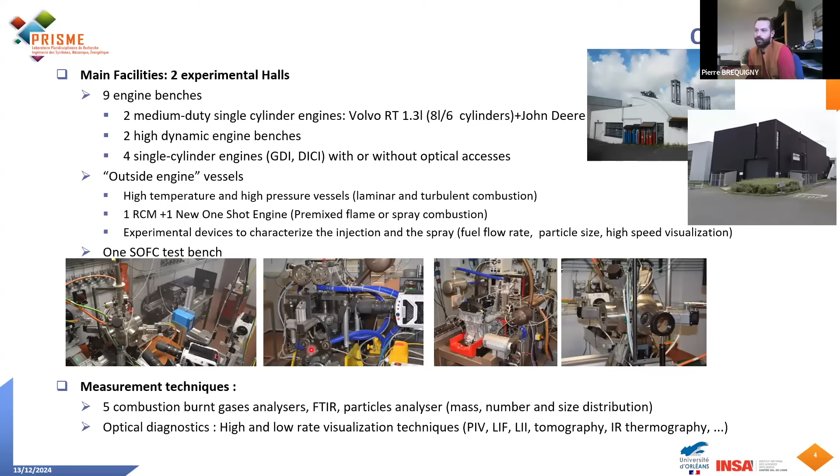We also have vessels to characterize injection and spray development for liquid and gaseous jets. We use a lot of optical diagnostics, techniques such as PIV, fluorescence, tomography, Schlieren, and so on. And on the engine test bench, we are also interested in exhaust gas analysis, using different kinds of analyzers.

So where do we place our activities? Basically, we are really between the chemistry fundamentals data, where we can find burner, JSR, or kinetic mechanism development, and the multi-cylinder engine standard engine activity, where we are developing powertrain, testing the fueling system, the lubricant as well, or different combustion modes.

Between that, we are covering from fundamental data like laminar burning velocity, ignition delay time measurement, the interaction between the flame and turbulence, the effect of the aerodynamics of the engine on the spray mixing formation in the chamber or the ignition itself, and then try to characterize a bit the energy output of the engine using in-cylinder pressure measurement, heat release rate, and how this can affect pollutant emissions.

You can see some of our partners for collaboration below, both academic and industrial. You can recognize one, Belgium, here.

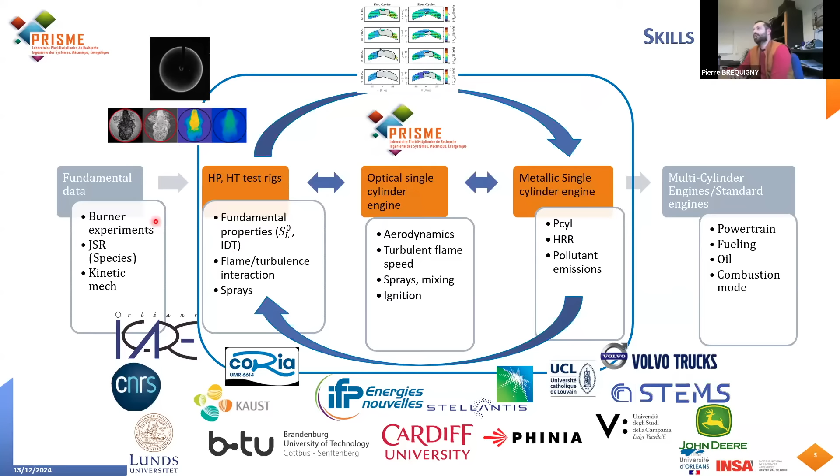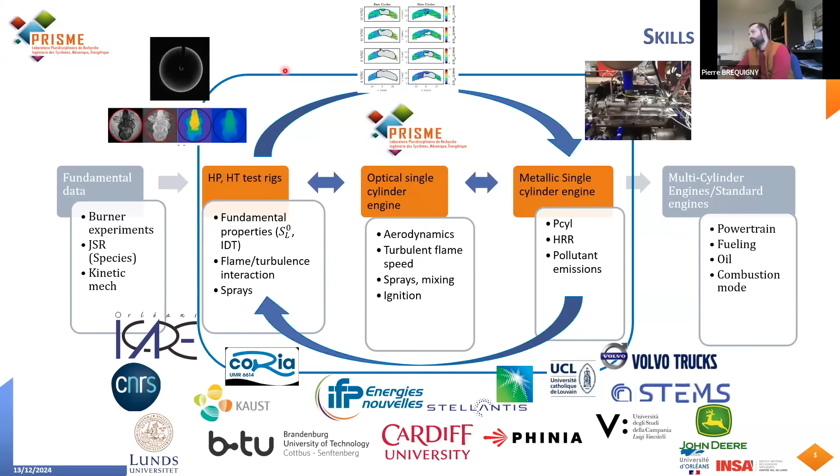This is a bit the type of data we can produce. Here you have first a laminar flame propagating. Here you have hydrogen jets. Here you can see some flame propagating inside an engine together with the velocity field acquired using the PIV technique. And this is a photo of a single cylinder all-metal engine where we can get the heat release rate and the pollutant emissions.

So basically, my research is using all of those experimental setups. It is more focused on premix turbulent combustion, starting from the laminar burning velocity measurement using a combustion vessel, then how this laminar flame can interact with turbulence during its propagation and how it is accelerated by the turbulence or not.

Then, how it works in an engine. Because the flow field is much different than in our vessel here, we also have very different conditions in terms of pressure and temperature. And finally, how that affects the performance of the engine, both in terms of power output, efficiency, or emissions.

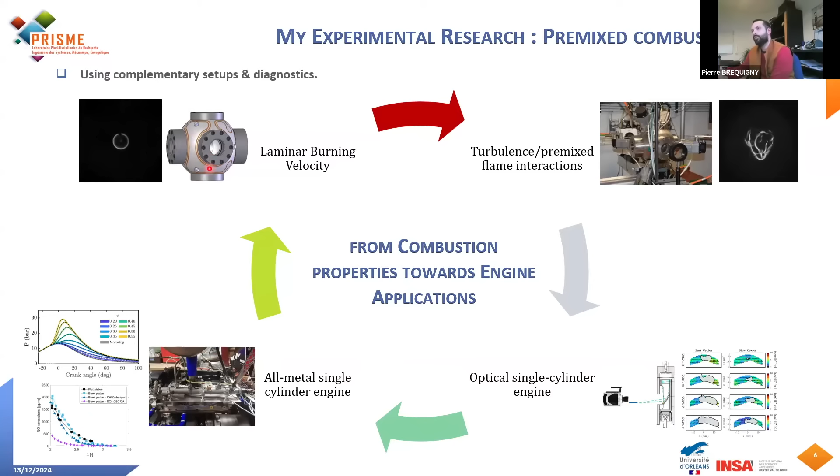And we can have a look, because some of this result can at some point be explained by the fundamental data, or try to be correlated with the fundamental data, as I will show later on in my presentation.

So how did I get my inspiration for this presentation? I will start with two things that I liked. The first one is history. I'm really passionate about history, reading books, watching documentaries, and actually as a kid I wanted to be a history teacher. So I'm a teacher, but not in history, it's not bad.

And the second thing that I like, which was the point of this presentation, is Belgium. Not only to make those people happy, because I used to work with them, collaborate, discuss, and it's always a great pleasure, because also, as Alessandro said, I spent some time there in Belgium and I have the best memories there.

So combining those two things that I liked, this is what we can find in the books. I don't know if you are aware of this, but this is a coal gas ammonia fuel bus. During the Second World War, due to diesel and gasoline shortage, the Belgian people had to convert their bus fleet to ammonia. And this worked quite well.

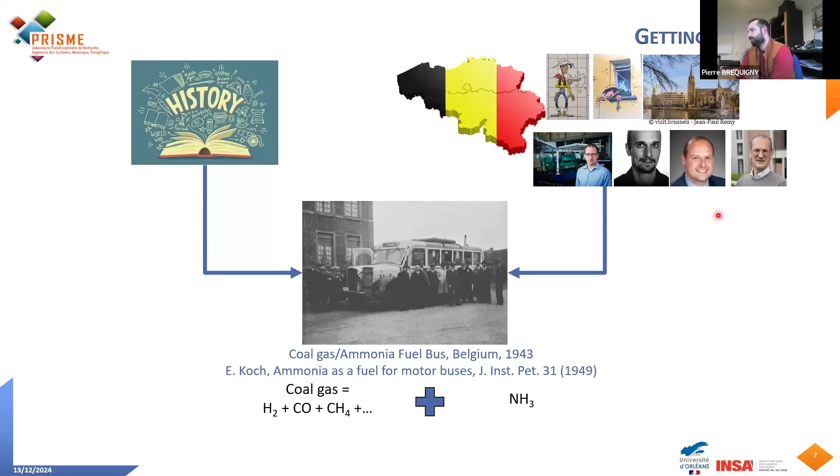And if we look a bit closer at what we have in that engine, actually coal gas and ammonia. So basically, these buses use all the fuels I'm currently working with. It has hydrogen, it has ammonia, but it also has a mixture of hydrogen, CO, methane, which can be called syngas in our case.

So this is basically the outline of my presentation. I will start with hydrogen, fundamental engine work, then ammonia, and then biogas and syngas with, for sure, a bit of ammonia because we are kind of ammonia lovers in the lab.

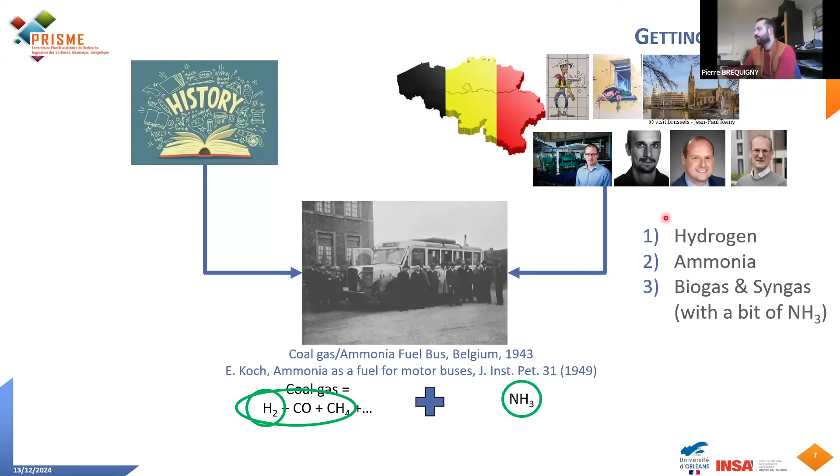So let's go back to the future then. As said, I will start with the hydrogen activity. The PI of those activities is Fabrice Foucher. You can see different collaborators that worked on this in recent years. It is based on several industrial collaborations, but also national research projects.

Regarding the hydrogen engine, it has several challenges. First thing we can say is it kind of competes with fuel cells. And to compete with fuel cells, the hydrogen engine has to be zero emission, which is quite challenging. But using lean to ultra-lean mixtures, so very high lambda, you can reach almost zero NOx emission, as you can see from that figure here.

Other challenges using that include reaching high load. At some point, you always need to increase a bit the equivalence ratio. You can also have knock or super-knock occurrence, even with those lean mixtures. As you can see on this graph of in-cylinder pressure acquired in an engine, as a function of crank angle degree, this blue curve shows kind of super-knock, even with very lean mixture, and this was done in our lab.

And also another challenge is backfire, especially in the case of port fuel injection, when at some point the flame goes back into the intake, which is critical in terms of safety. So this is how we worked a bit with hydrogen here in the lab.

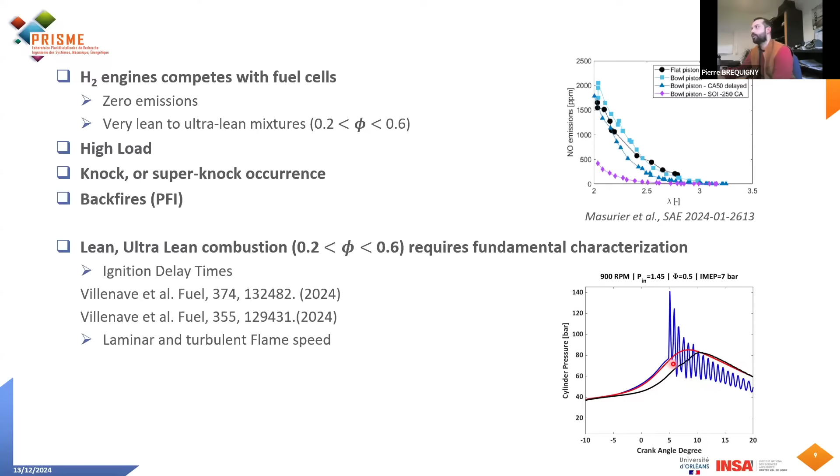So to investigate those laminar and turbulent flame speeds, we have a combustion vessel in the lab, which is here. It has 4.2 liters of internal volume. In terms of initial conditions, the maximum are 10 bar and 200 degrees.

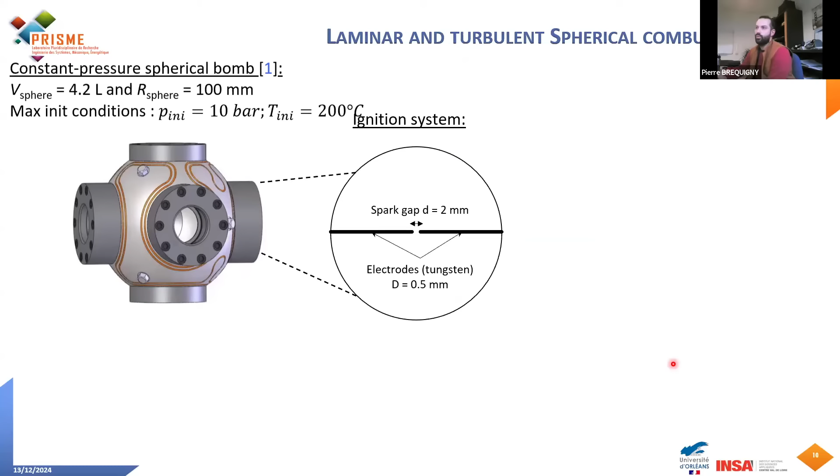Inside, we can find two tungsten electrodes that enable us to ignite the gaseous mixture inside. We can implement fans or not to generate a homogeneous isotropic turbulence zone inside the vessel, to study flame-turbulence interaction. In the case of laminar combustion, we only use one fan, basically to mix the air with the fuel and to have something really premixed before igniting the mixture.

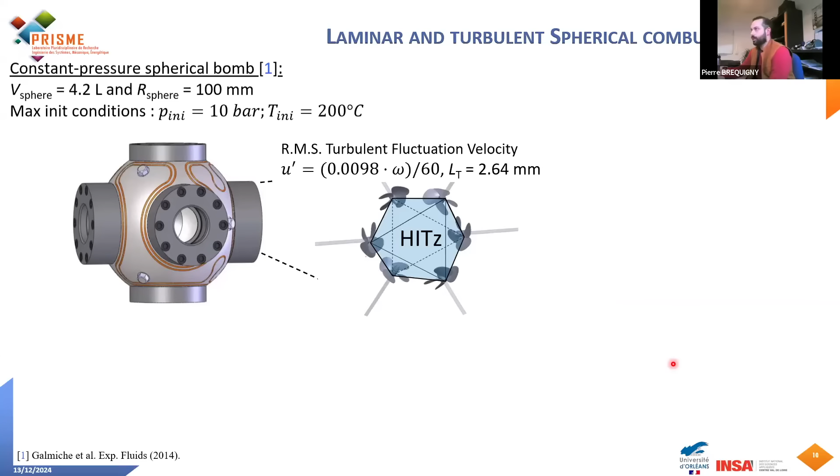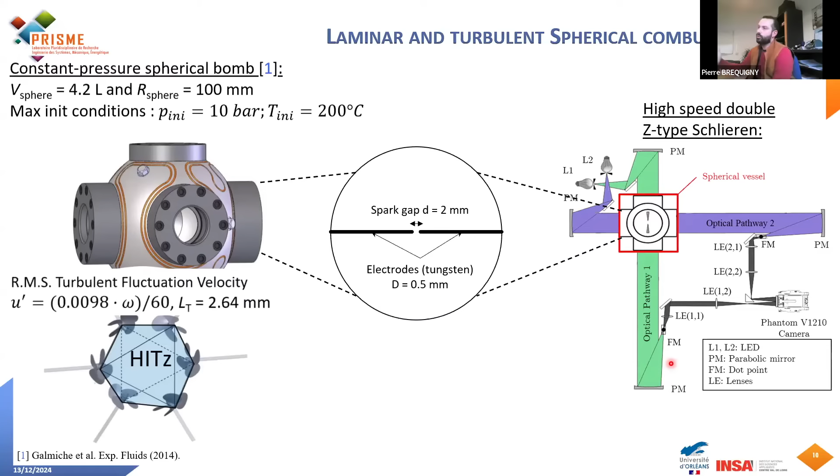And then we use optical diagnostics. Here an example is a double Z-type Schlieren viewing that gives us two planes of visualization of the flame, and allows us to follow the flame propagation and then measure the speed.

So how do we measure the speed? From the radius evolution, we can compute the propagation speed. And since the flame is spherical and expanding, it is affected by stretch, so it is something we have to compute as well. It is defined as follows, and it basically depends on the flame speed and on the curvature.

So when we want to measure the laminar flame speed, we have to be at zero stretch. It is not possible to reach that condition in our vessel, so we have to extrapolate the data at zero stretch. Here you have an example of the flame speed, the propagation flame speed, as a function of the stretch.

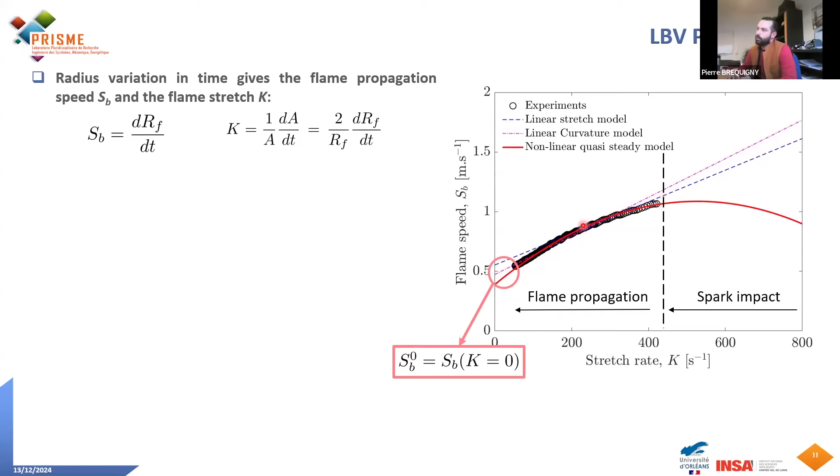Here you have the beginning of the propagation, which is impacted by the ignition, by the spark, so we have to remove that part. And then we have our experimental data. As you can see, it does not reach the zero stretch, so we can use several extrapolations to go to this zero stretch point.

The first one is called the linear stretch model, defined as here, where you can see the propagation speed at zero stretch, the stretch, and the LB parameter, which is very important here, which represents the stretch sensitivity of the flame. Basically, it is called the Markstein length.

This one is well appropriate for mixtures that have equidiffusivity, so a Lewis number equal to 1. But in some cases we cannot use it, because some mixtures deviate from Lewis number equal to 1, especially hydrogen. So we can use a second extrapolation model, which is only based here on the curvature, as you can see on this term.

And the last one is the nonlinear one, which is a bit more complex in terms of extrapolation, and is well adapted for mixtures that strongly deviate from Lewis equal to 1, and highly stretched flames.

So you can see here the results of those three computations, and it gives very different results depending on the fuel and its properties.

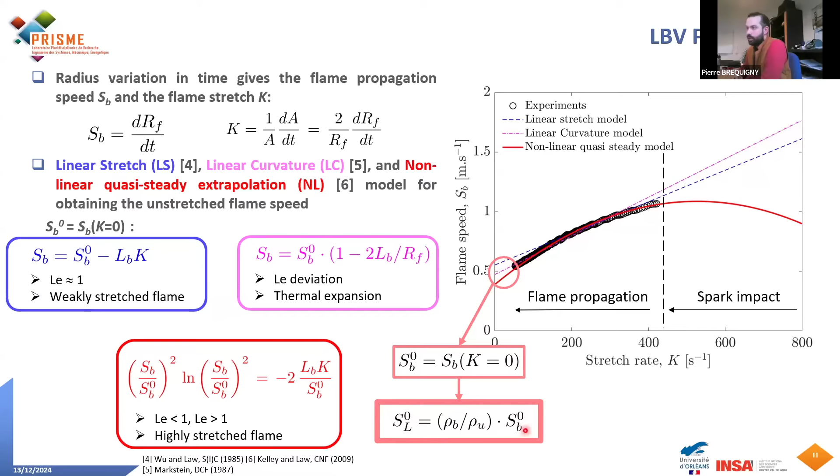At the end, basically, we need to recover the laminar burning velocity, and we only need the expansion ratio, that is usually computed with an equilibrium computation.

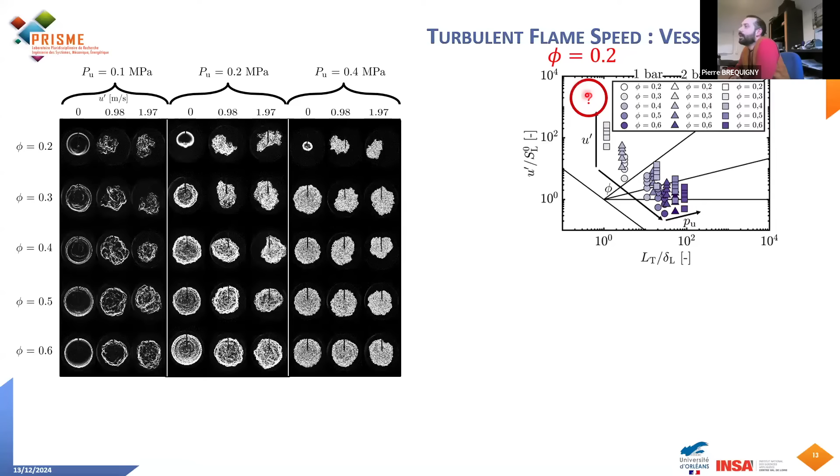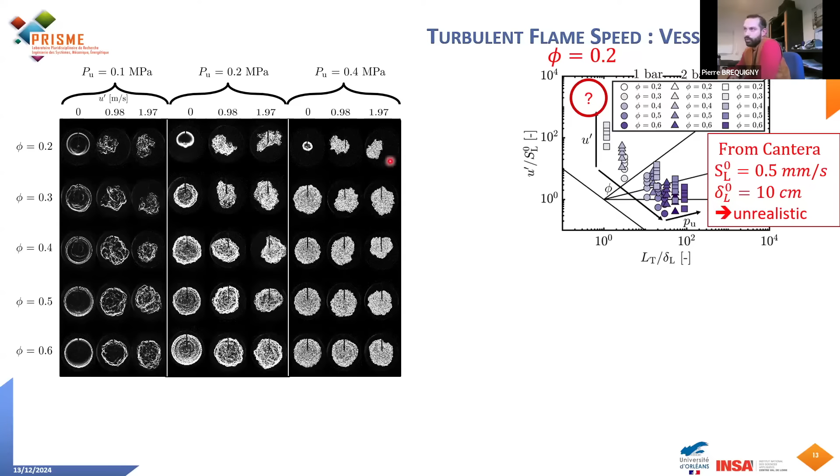But at some point we have a problem, because as you can see, there is no white data, because we are not able to properly estimate the laminar properties of the flame in those conditions. If you do a simple Cantera simulation, you will get that order of magnitude for the laminar flame speed values, and especially the flame thickness, which seems a bit unrealistic if you compare to the flame you are looking at in the vessel. So we don't really know how to place those flames in the Peters-Borghi diagram.

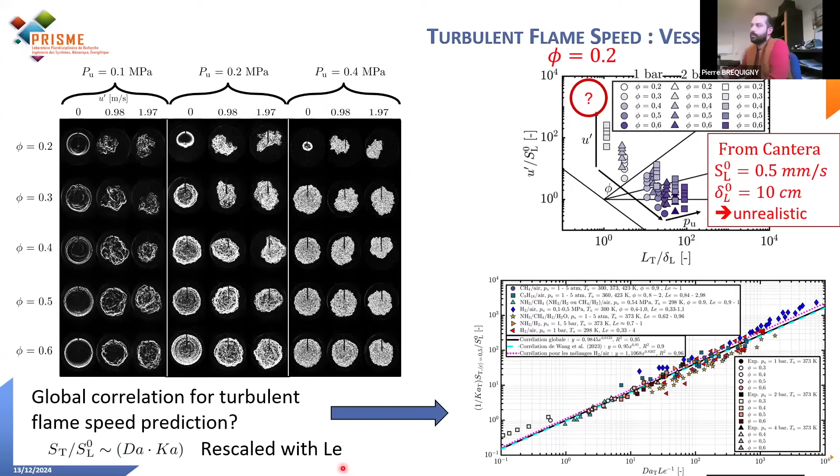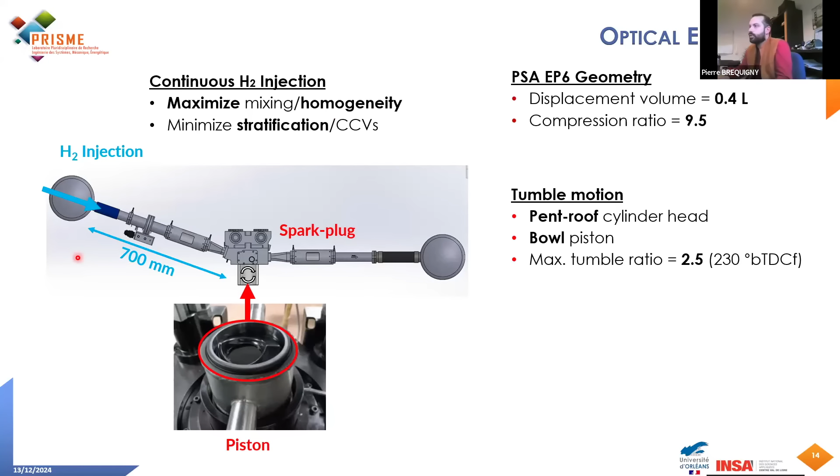The motion is a typical spark ignition engine motion, because it has a pent-roof cylinder head. So you will have a tumble motion that will break as the piston moves up and will generate the turbulence afterwards. We have a continuous hydrogen injection placed here in order to have as much as possible a homogeneous mixture, in order to avoid any stratification and different equivalence ratios inside the chamber. And then we can follow the flame chemiluminescence using a filter, an intensifier, and a high-speed camera.

We covered very different operating conditions. So it's quite low engine speed for a spark ignition engine, but due to the optical access, you cannot increase the engine speed that much, otherwise you break it.

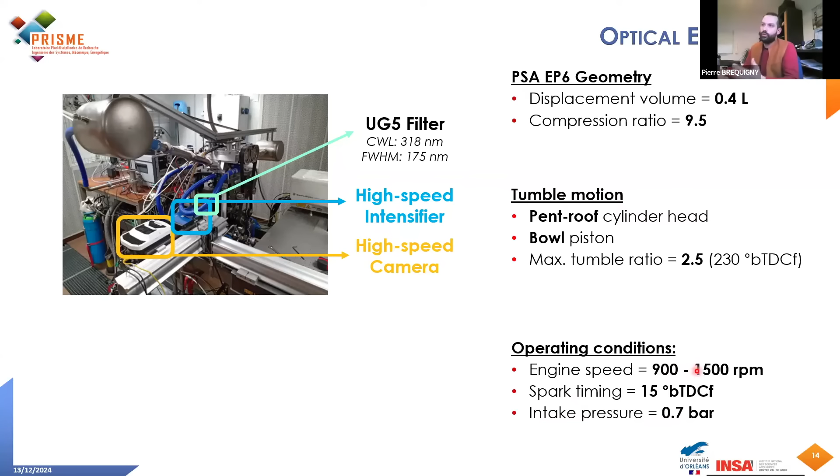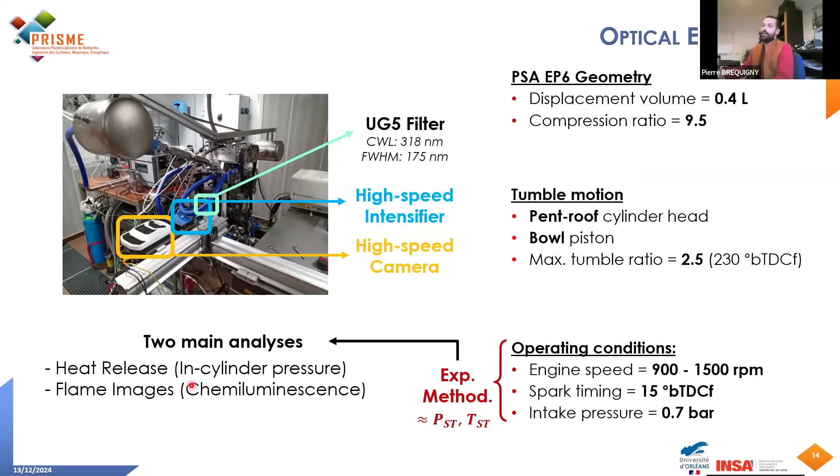The spark timing is quite standard, and it is also low intake pressure, a bit for the same reason as the engine speed, in order to not break and to not have too high a load inside the engine. We can then do a coupled analysis between what we can see from the camera and what we can get from the in-cylinder pressure sensor, which will also give us the heat release rate and, let's say, the combustion phasing inside the engine cycle.

So basically, from the images, this is the typical type of flame image you can get from hydrogen combustion. And again, here you have the Peters-Borghi diagram with all those different combustion regimes. So here we varied the equivalence ratio from 0.55 down to 0.2. And as you decrease the equivalence ratio, same as before, you are moving up in the Peters-Borghi diagram, into the region called the broken reaction zone, where basically you have a Karlovitz number that is very high, and normally there is no CFD model that is really able to handle that.

But looking at the flame, it just looked like a very wrinkled flame, very distorted. So perhaps it is still a flame that is propagating, perhaps with sometimes local extinction. We don't know because it's difficult with that diagnostic. And if you increase the equivalence ratio, you can see that the flame gets more and more spherical, which makes things easier in terms of diagnostics.

And then we can go back to the turbulent velocity measurement, but this time in the engine with engine conditions, both in terms of pressure, temperature, but also turbulence. And you can see that we are able to fit a simple Zimont model, which is regularly used in CFD computation to compute the turbulent burning velocity.

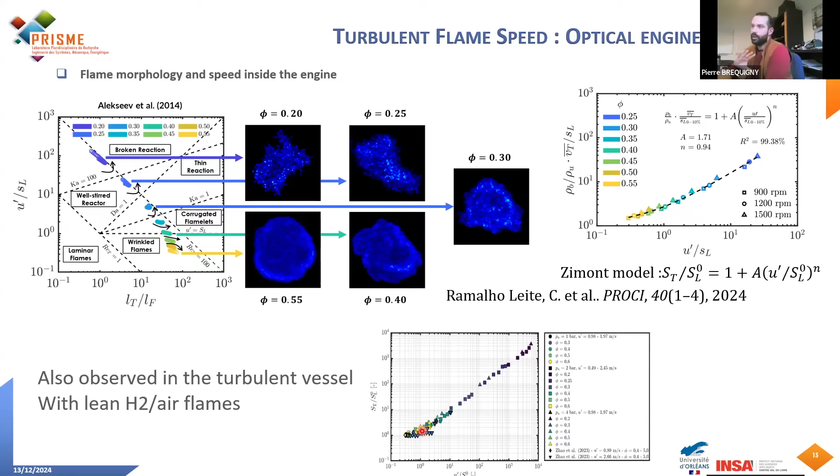And one interesting thing is that we also observe a similar correlation, at least for lean mixtures, here for example from 0.2 to 0.6, in the vessels, which gives us a bit of confidence in that relation. It is interesting to see that we can find it both in the vessel and inside the engine. So this is most of the work done with hydrogen.

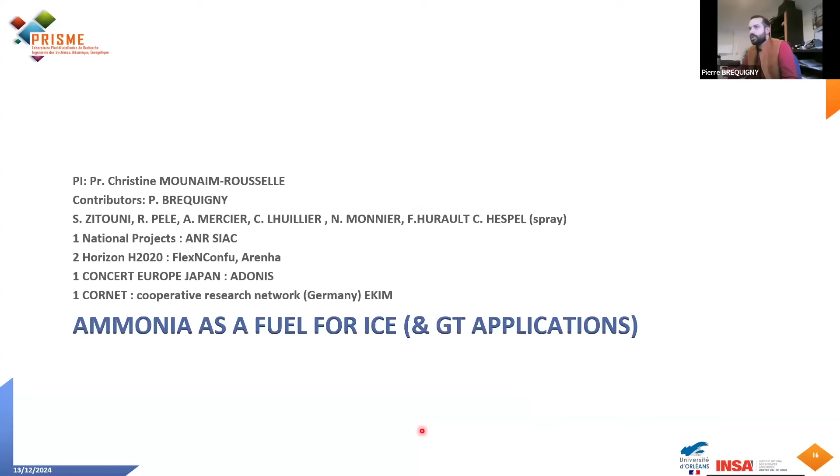I will now move to another fuel, which is also a hydrogen carrier, ammonia. This is the main part of my presentation because we have been working on ammonia for 7 years together with Christine, with a lot of national, European, and collaborative projects. And I have to acknowledge here a Belgian colleague, Francesco Contino, because the momentum came from him. So, just a bit of a word on ammonia.

There are more and more projects announced to produce renewable ammonia all over the world, either in South America, in Australia, but also in Europe and Africa, and with very different scales. But for the moment, there are very few pilot facilities.

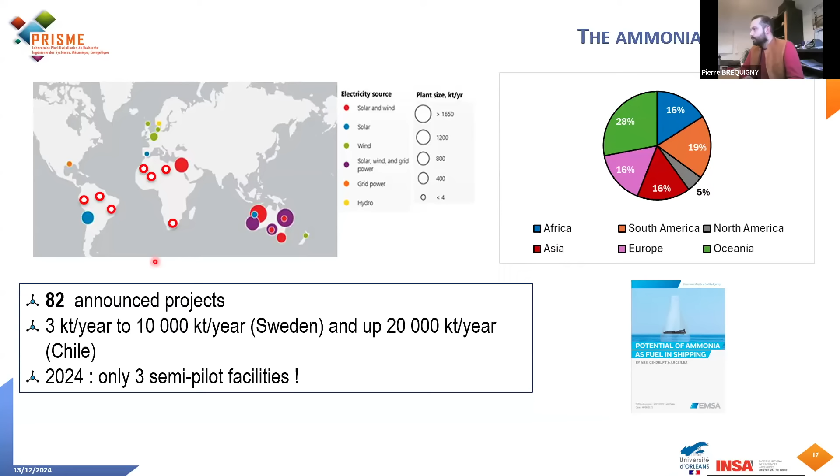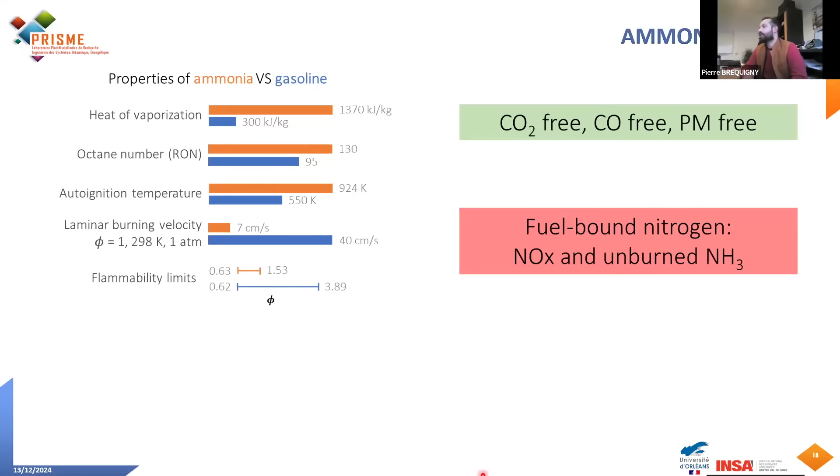So how do we do it with engines? When we started the work, we thought that due to the high octane number and the auto-ignition temperature, the spark ignition engine was an easier solution to use ammonia as a fuel. The idea is that either you can use it pure, neat ammonia, is it possible? We don't know. Or due to those slow burning combustion properties, perhaps we can blend it with another combustion promoter. You have here a list of what we tested in the laboratory: methane, hydrogen, and alcohol.

Another idea, still with the spark, is to go with a compression ignition engine due to its higher compression ratio that leads to higher efficiency, but use it with a spark, and then favor the use of neat ammonia to avoid any other tank on a vehicle, which makes things easier.

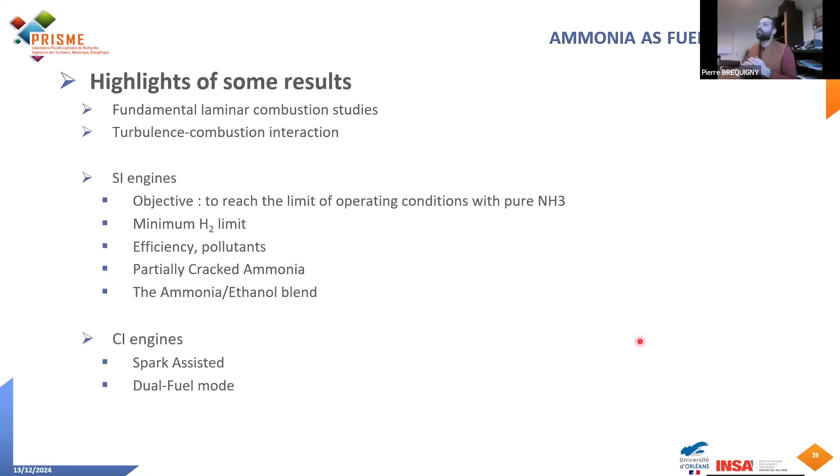So presenting all those possibilities with ammonia engines, I will present some highlights of our results. First, starting with the fundamental properties, a bit of turbulence and combustion interaction. Then our results obtained with spark ignition engine, where our objective was, let's say, to reach the limit of operating condition with pure ammonia and see how we can extend those limits. And last, see how ammonia can be used in compression ignition engine.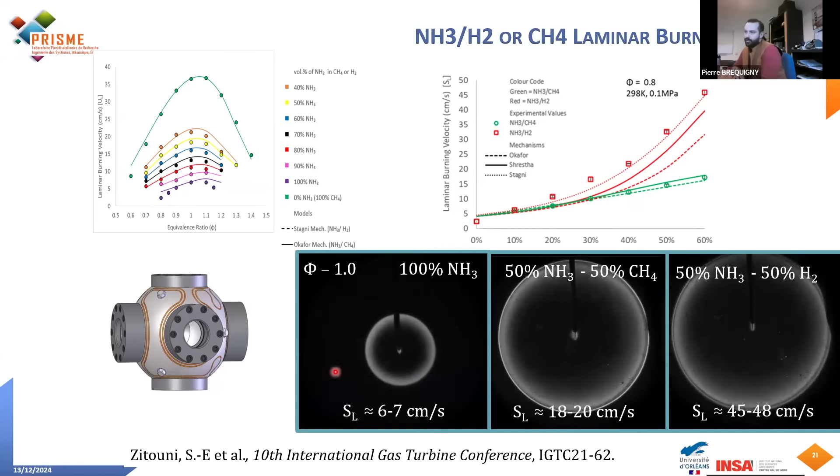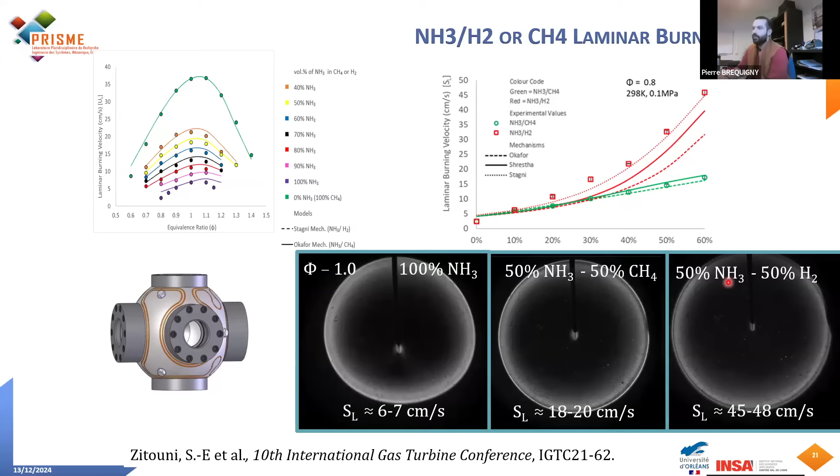How those flames look like. So here you have stoichiometric 100% ammonia flame. You can see how slow it is, compared with 50% ammonia, 50% methane, and a 50-50 ammonia hydrogen flame. So that is the first thing we noticed about the ammonia flame and how we can, let's say, improve it easily. But also adding those fuels will really impact the other properties.

And again, we are here interested in the Markstein length, especially because it gives an idea of how the flame will respond to the turbulence inside an engine. So basically, when you add methane here, you decrease the Markstein length. So you are less sensitive to the stretch. And since you are getting closer to zero, you may favor a bit the propagation with the turbulence. But here with hydrogen, you even tend towards negative values of the Markstein length. And this means with turbulence, you will strongly enhance your flame acceleration. And this is a typical behavior of hydrogen addition that was also found putting some hydrogen into methane, for example.

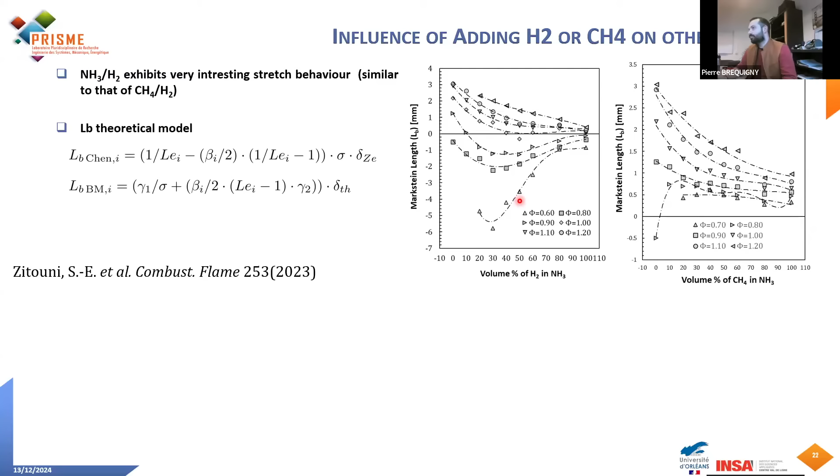So again, we tried our theoretical model here to see if this behavior is correctly predicted, let's say. And we found some agreements. So you have here lean, stoichiometric, and rich mixture. And we find some agreement between our experimental Markstein length measurement and those theoretical models, with the exception of this point. So pure ammonia, 0.8 of equivalence ratio, which is a bit out of the trend, but we are currently investigating it again. And so here you can see basically that for lean and stoichiometric mixture, you can really get a negative value of the Markstein length due to the hydrogen addition.

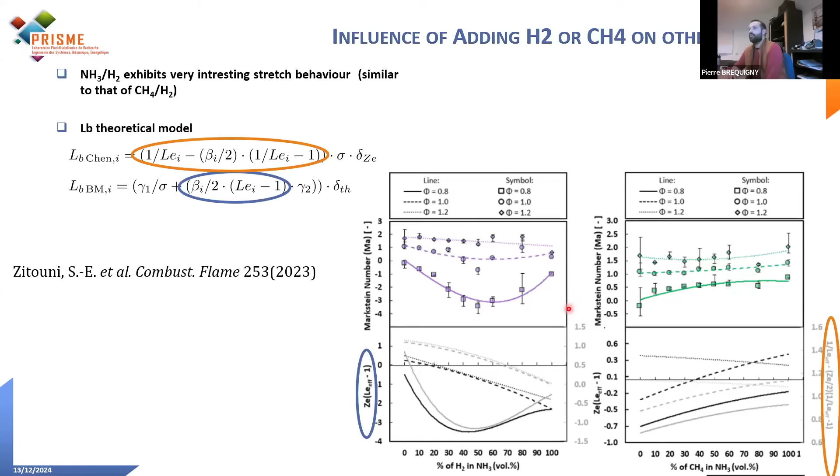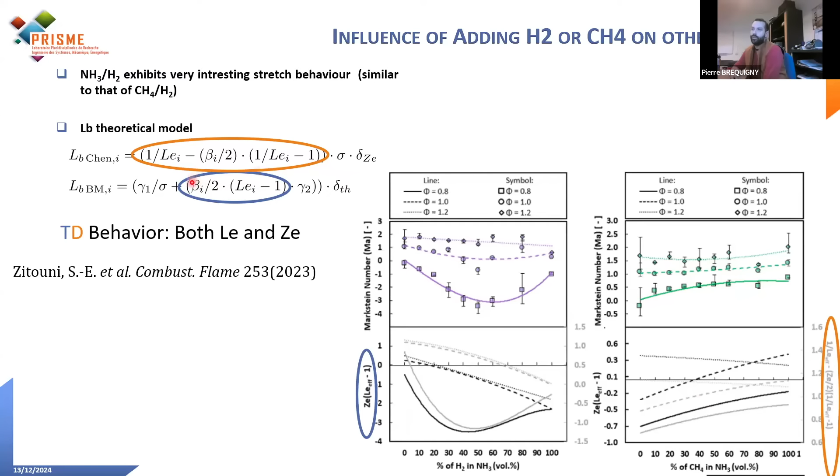And why you get that? Because basically of the thermodiffusive behavior of the mixture. So in those two theoretical models, we can isolate two terms, this one for the Chen model and this one for the Bechtold and Matalon model, that are represented here and here for both hydrogen addition on the left and methane addition on the right, and compare with the Markstein number, which is basically the Markstein length divided by the laminar flame thickness. And we can see that this Markstein number follows the same trend as those terms, which represent the thermodiffusive behavior of the mixtures, since it has both the Lewis number and the Zeldovich number, which is related to the activation energy.

And this helped us also to understand how it works inside an engine. So since ammonia has a very slow flame, the idea is to boost it with either hydrogen or methane. And the question is how this impacts the engine propagation. So here you have a graph of the CA50, so it's the timing where you have 50% of mass burned inside the engine, minus the spark timing. So it is a duration in crank angle degrees.

And basically you can see that when you add hydrogen in your ammonia, you strongly shorten the combustion duration. Whereas with methane, you basically have something constant. Question is why? Because in both cases, you improve the laminar burning velocity, so you should be, let's say, faster with both promoters, but it is not the case.

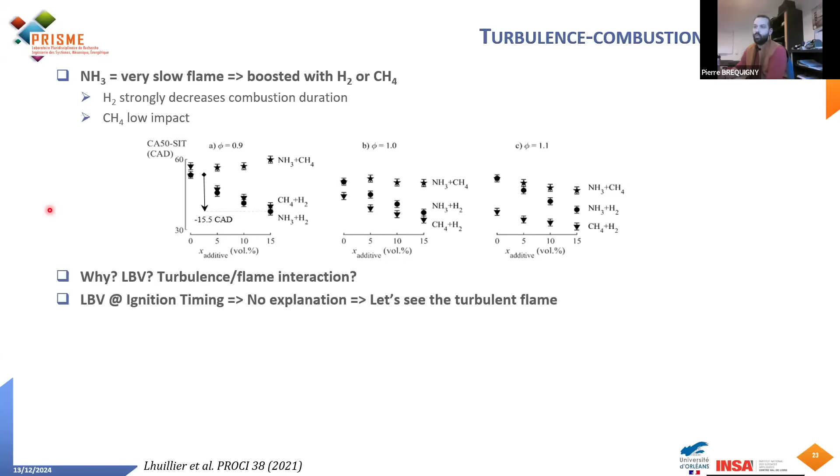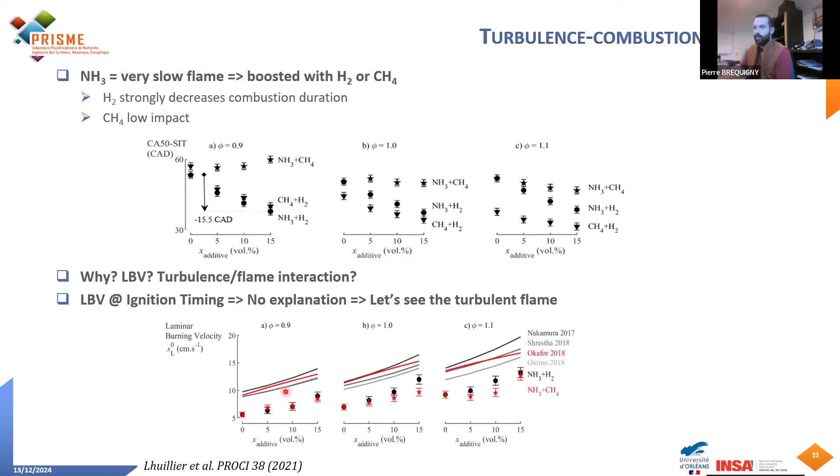So let's see what the turbulence flame interaction says. As you can see here, you have the laminar burning velocity for lean, stoichiometric, and rich, and you can see that both hydrogen or methane addition provokes the same laminar burning velocity enhancement. So it is not that which leads to this engine behavior.

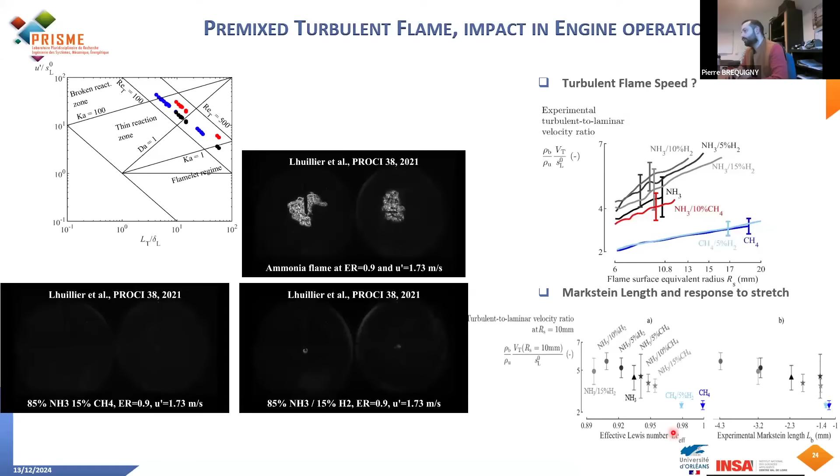And this is basically related to the effective Lewis number, so the thermodiffusive property of the mixture, and the experimental Markstein length, as we can see from those trends. Okay, so now we are able to understand a bit how the ammonia flame happens inside the engine, how it interacts with the turbulence. But what do we have in terms of performances and emission?

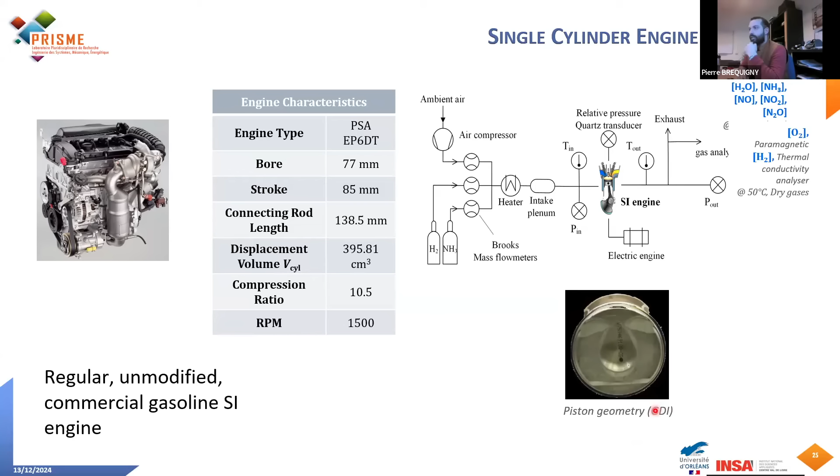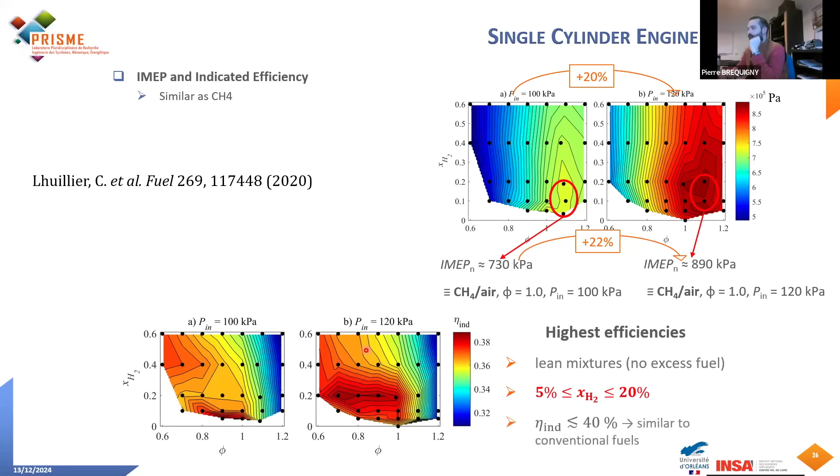So looking at where we get the highest efficiency, it is basically for lean mixture, so below 1, here the red zone. And also it is not necessary to add that much hydrogen. More than 20% is not necessary in terms of efficiency, because after you start to decrease again the indicated efficiency. And in terms of value, we are able to get more or less 40%, a bit less, which is similar to other fuels such as methane, for example. So here, ammonia is surprising us in terms of performances.

In terms of combustion phasing, you can see here the combustion duration for different combustion phases inside the engine. So here you have 10% of mass burned minus the spark timing. Here it is, let's say, the flame propagation phase, so 50% of mass burned minus 10% of mass burned timing. So it's again duration in crank angle degree. And here the total combustion duration.

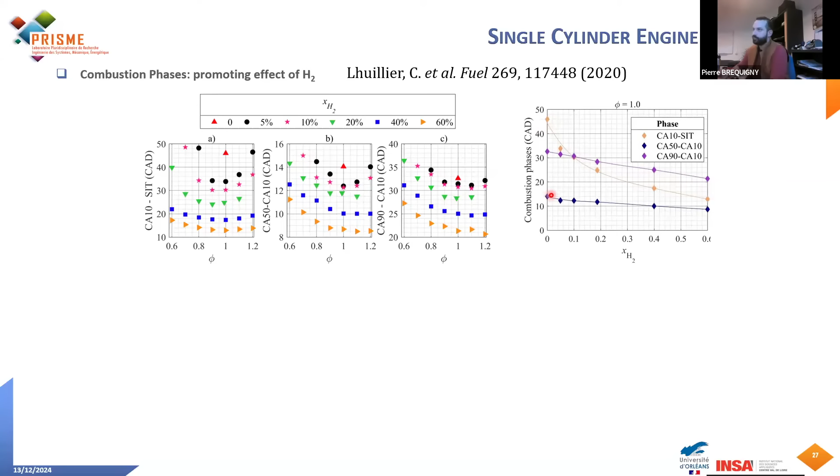And starting from the neat ammonia, here it is the red point. We were only able to do a stoichiometric condition in those experiments. You can see how adding hydrogen strongly decreases the combustion duration, and especially the first phase here, where hydrogen has its biggest impact. So this is how we are able to get better performances with hydrogen.

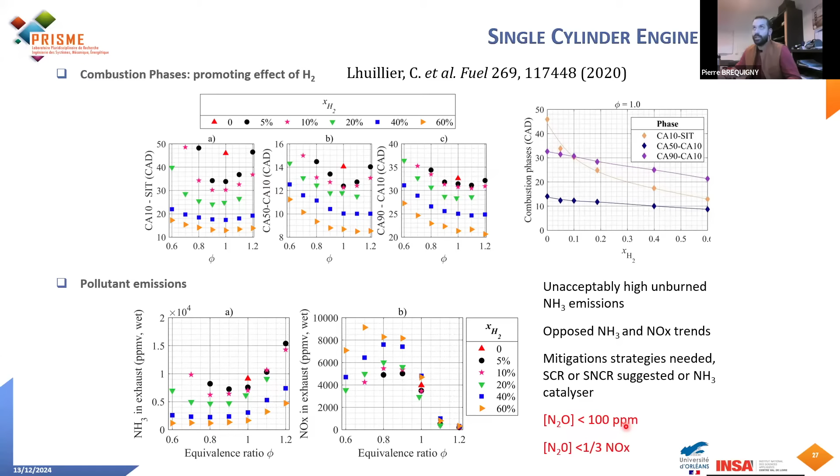So mitigation strategies are clearly needed here, either using SCR, so selective catalytic reduction, or an ammonia catalyzer, for example. But this is an activity that is not covered in our lab. Another emission that is important when you deal with ammonia is the N2O, because N2O has a global warming potential that is 300 times higher than the CO2. So here we measure less than 100 ppm, which is equivalent to about 1 to 2% of CO2 at the exhaust.

Okay, so as you can see, operating with neat ammonia is quite challenging. So we try to extend a bit the condition and see where the limits are. So here we studied 3 different equivalence ratios: lean, stoichiometric, rich, near stoichiometry still, 4 different engine speeds from 650 RPM up to 2000 RPM, different intake pressures, so to have different engine loads. So below atmospheric, so 0.65, about 0.8 and 1 bar intake pressure, and try to have minimum hydrogen addition, so up to 10%, because as we saw before, it's not necessary to go to more than that, to not decrease the efficiency.

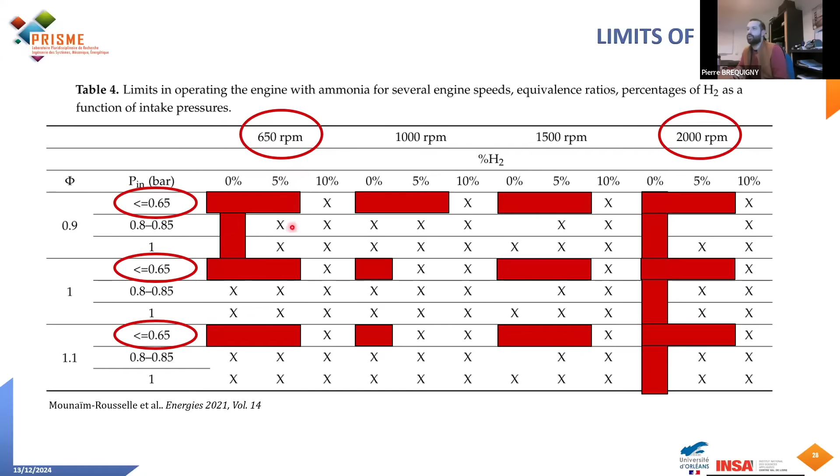So here, where we don't have any crosses, is the condition where we were not able to run with stable operation in the engine. So you can see that at low and high engine speed, running on neat ammonia is difficult. The other problem is the low load. So when you decrease the intake pressure, you cannot run on neat ammonia, and even sometimes 5% of hydrogen is not enough to get stable operation. You have to go up to 10%.

Okay, the question is, how do we push back the limits with ammonia? So our first idea was to take advantage of the auto-ignition resistance of ammonia. So we chose to use a diesel baseline engine, removing the diesel injector and put, I'm a bit simplifying, instead of the injector a spark plug. And this engine features a compression ratio that can be varied from 14 to 17, so much higher than the conventional spark ignition engine we use.

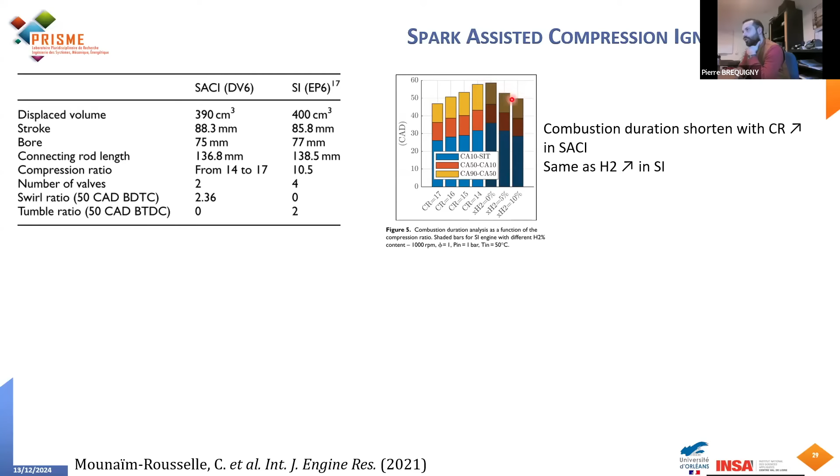And the first thing, if we look at the combustion duration, so you have here the bar graph representing the different combustion phases as I presented before, you can see that increasing the compression ratio inside that diesel baseline really decreased the combustion duration, a bit in the same way as the hydrogen does inside the conventional spark ignition engine with the shaded bars here. So this can be a good point.

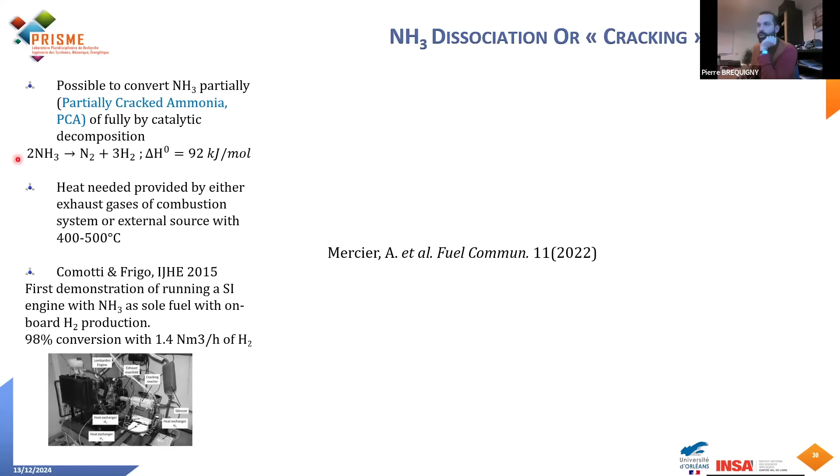And you can use, for example, the heat from the exhaust gases that will allow you to crack the ammonia here. And this was actually done by Comotti and Frigo in 2015, where they put an ammonia cracker online in the engine, and they were able to achieve 98% of ammonia conversion. So we reproduced that, but without the cracker, so reproducing the gas composition, a partially cracked mixture composed of ammonia, nitrogen, and hydrogen. And this is the benefit we can get. You strongly increase the laminar flame speed. So here starting from pure ammonia and then cracking it up to 60%. And you can see how it decreases the combustion duration again.

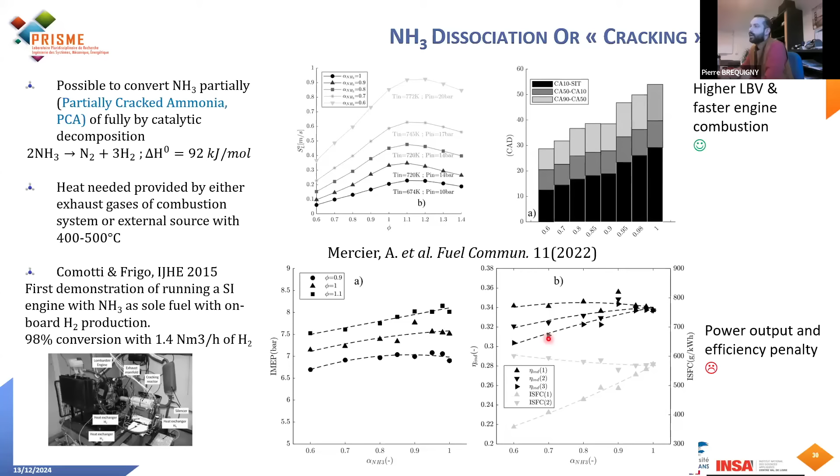But you have some penalty doing that cracking. So first, you decrease the power output for all equivalence ratios, although it is a slight decrease. But you also decrease the indicated efficiency, and this is curve 3 here, especially if you consider the energy required to crack the ammonia. So this is a clear drawback of this solution.

What about the turbulent flame speed of those partially cracked ammonia mixtures? And also how do we enhance the laminar flame speed, as it is not exactly the same as just blending ammonia and hydrogen, since you have a bit of nitrogen in it. Starting from 5% of cracking up to 40% of cracking, you can see that you both increase the laminar burning velocity here, but you also shifted its maximum towards richer mixture due to the presence of hydrogen.

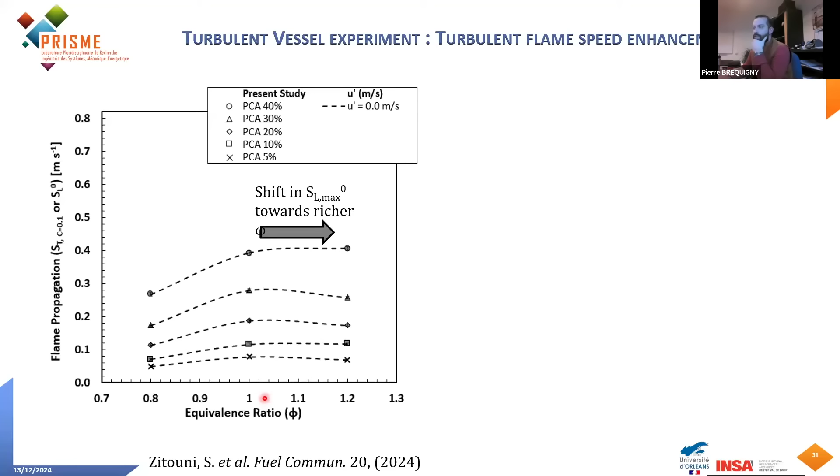So this is without any turbulence. Then we add turbulence, and what we can see is that for lean and stoichiometric mixture, you have an enhancement of the flame speed. So your turbulent flame speed is higher than your laminar flame speed, which is expected, but it is not the case on the rich side. So you have little to no flame speed augmentation there. Basically this is again due to the thermodiffusive property of the mixture, and especially the Lewis number that is due to the diffusivity of hydrogen that is enhanced for lean mixture.

And here, if you look at the turbulence effect, you can really see, for 3 different turbulence levels, how it is much more affecting the lean mixture in comparison to the rich mixture. So again, the partially cracked ammonia is not a straightforward solution.

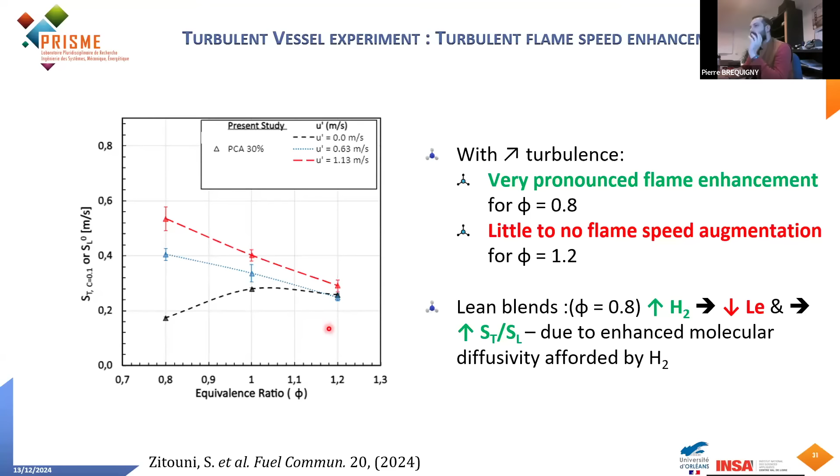So the last thing we tried with those spark ignition engines is to use another kind of fuel. And ethanol was good for us for several reasons. First, it has a high laminar burning velocity.

So we studied the improvement, the enhancement of the ammonia laminar flame speed here, adding ethanol in it. You can see here at 1 bar and 423 Kelvin how you can enhance it, from let's say 10 or 15 centimeters per second up to 70 centimeters per second. So you can really improve these combustion properties.

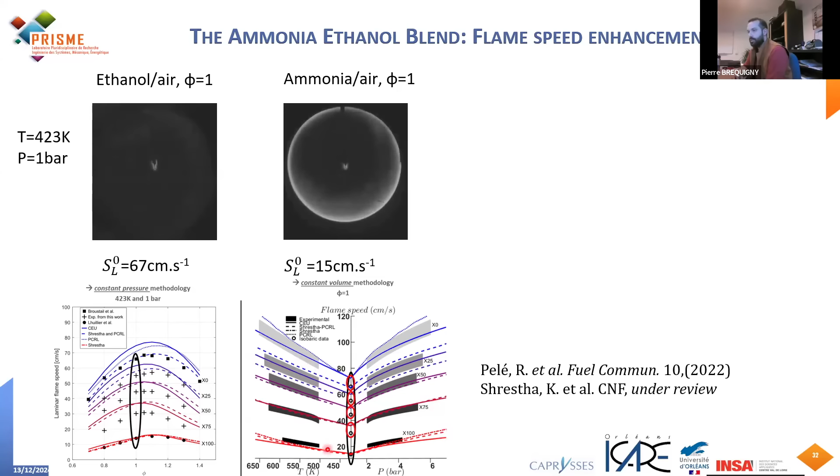And we also studied how pressure and temperature simultaneously affect this laminar flame speed in another vessel. And again, here you can see that a small addition of ethanol can really give you a big gap in the laminar flame speed.

And the other interesting property is that ammonia and ethanol are fully miscible. So we prepared a mixing test bench where we looked at the ammonia ethanol mixture, and you can see here on the liquid part, you only have one phase. Whereas if you try to mix ammonia with gasoline, you can see that you have 2 phases, even with higher pressure. So you are not able to properly mix.

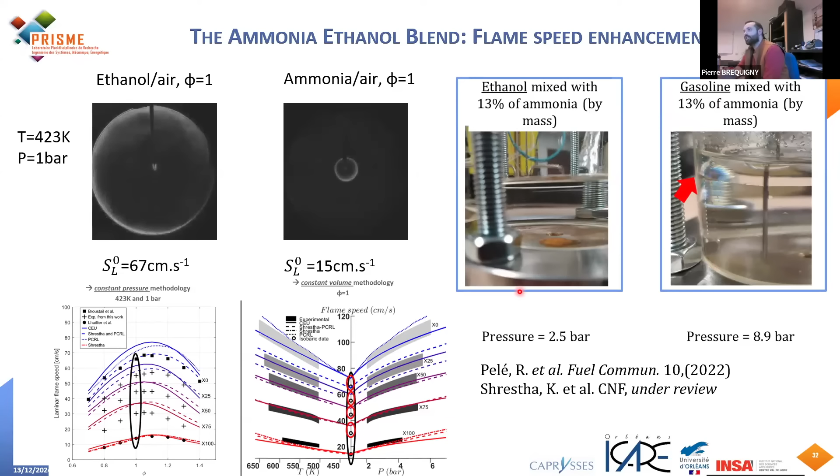So this is a good feature of ethanol, since you can then imagine a single tank and a single injection system for an ethanol ammonia blend.

What about the engine? So we tried then, as it is only one liquid, to use a direct injection. And it was the first data on direct injection for liquid ethanol ammonia blend in a spark ignition engine, in comparison to pure liquid. We tried 2 different injection strategies: a homogeneous one where basically the mixing is really introduced early in the blend, and a stratified one where you have a later injection, so let's say in the middle of the compression stroke.

So if you look at the thermal efficiency, you can see that you can get almost 40% of efficiency, similar to methane. Methane was here our target because we wanted to get the same power output as stoichiometric methane. That's how we set our blends here, from pure ethanol to pure ammonia.

So basically, the homogeneous strategy gives better efficiency, a lower fuel consumption, and lower NOx and CO emission for all blends of ethanol-ammonia. The stratified is able to produce shorter combustion duration and lower NOx and CO emission for pure ethanol at least. And there is no particular effect on the unburned ammonia between both strategies. We can only see that increasing the amount of ammonia in the blends will lead to higher unburned ammonia again.

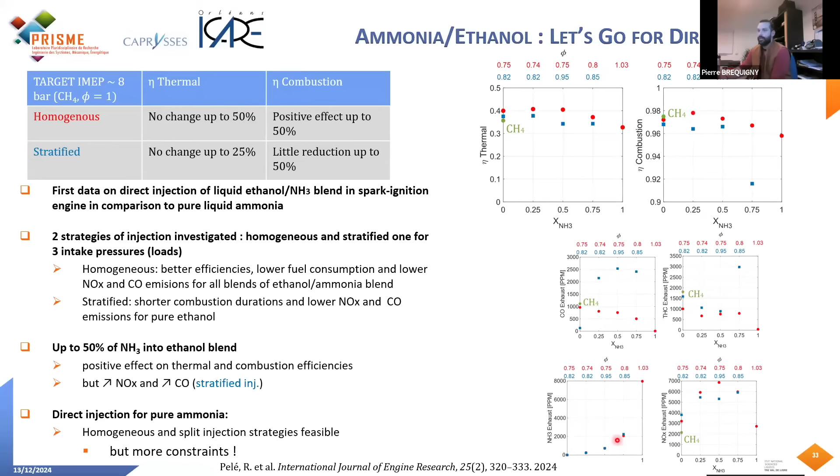So what we can say is that up to 50%, we can really have a positive effect of ammonia into the ethanol blend, both in terms of thermal and combustion efficiency, let's say, but we have to take care of the NOx and CO emission, especially in the case of the stratified strategy.

And the direct injection with pure ammonia was quite challenging because we really had to advance strongly the injection. For example, for the blend, it was always at the beginning of the compression stroke, but for the pure ammonia, it was at the beginning of the admission stroke.

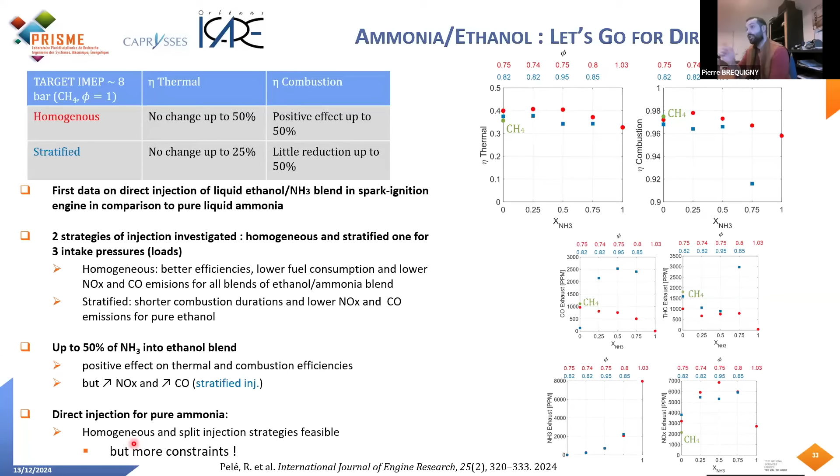So we tried a split injection strategy, and it was then feasible to run on pure ammonia with direct injection, but it was very constrained, and the phasing range is really restricted. So it's quite a challenging operation. I have to acknowledge colleagues who also work on ammonia spray.

And you also have this effect of the really higher heat of vaporization of ammonia that will affect the temperature inside the engine.

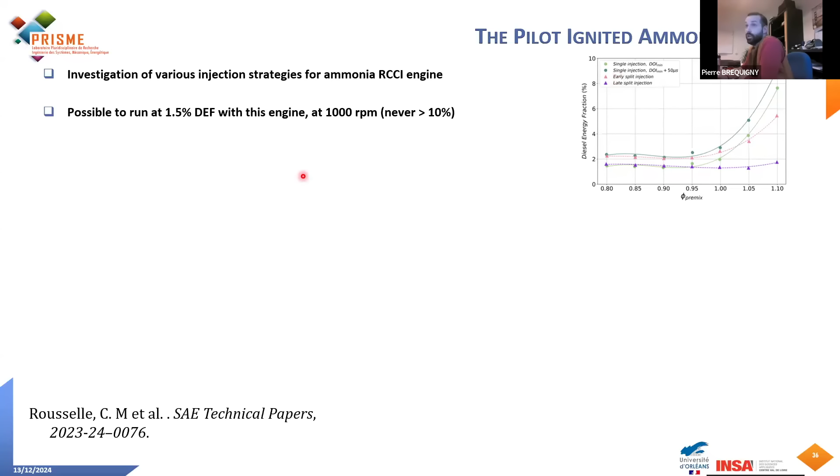What we can see is that the minimum diesel amount is not always the best operating condition, because adding just a bit more, you can get really higher efficiency. Also, having a split injection strategy seems to be a better approach to get both higher efficiency and allow decreasing

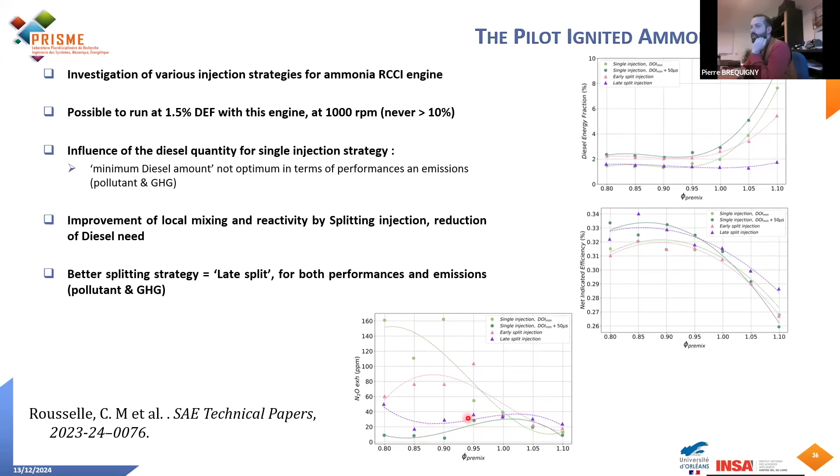the diesel quantity in order to decarbonize the engine as much as possible. The best splitting strategy for the diesel seems to be the late split, for both performance and emissions, especially looking at N2O emissions: with both the minimum single injection and the early split injection, you get from 80 to 160 ppm of N2O, whereas the late injection split strategy gives very low N2O emissions.

Okay, so this is almost done with ammonia, though I will still mention some ammonia in this part. The last low carbon fuel category I'd like to present is about biomass gaseous fuels.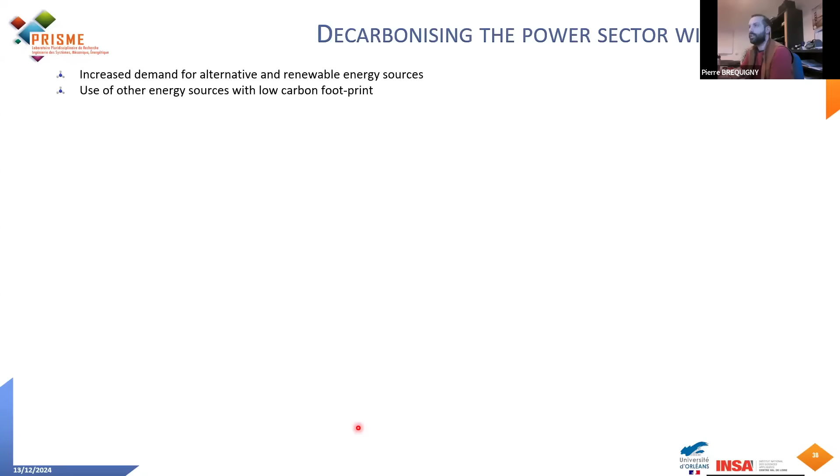How do we get energy from biomass? To get gaseous fuel, you can either use gasification, which produces a syngas or producer gas containing H2, CO, methane, carbon dioxide, and nitrogen, or you can use anaerobic digestion, which basically gives biogas. In that case, you can afterward use Fischer-Tropsch to get synthetic liquid fuels.

But here I will only focus on those gaseous fuels. It's also interesting to know that both processes can produce ammonia, especially gasification, which can lead to impurities such as ashes, tar, char, HCN, H2S, and also ammonia, especially when the feedstock is nitrogen rich, such as manure or sewage sludge.

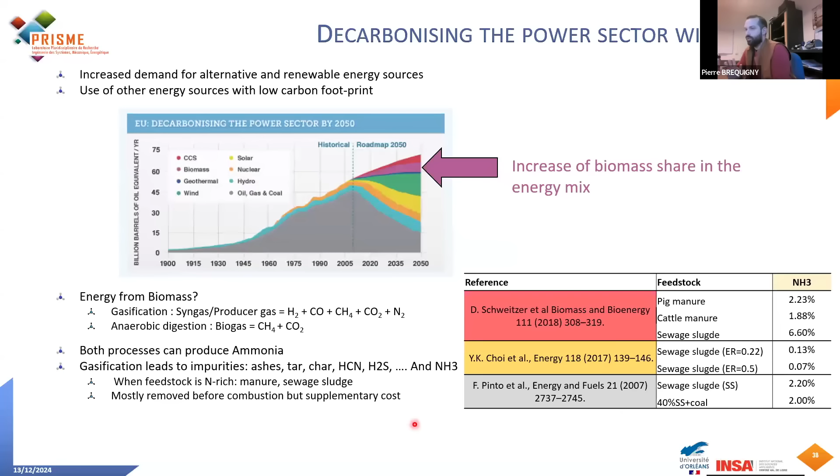And the question is, how can this ammonia quantity impact a genset application, or let's say a combustion engine, in its operation? So then we proposed a project funded by the CNRS called MASYNBIOZ, where we mix ammonia together with biomass gaseous fuels.

So the idea is you have a nitrogen-rich feedstock. You either use anaerobic digestion or gasification. You get a syngas or a biogas that can contain some ammonia, and at some point you can even mix it with, let's say, a renewable ammonia, depending on your feedstocks.

So the objectives in that project were to study the fundamental combustion properties of various biomass fuel compositions, various syngas and biogas compositions, studying both laminar burning velocity and stretch sensitivity, mixed with ammonia at some point, and then investigate how those compositions and adding ammonia can affect engine performance and emissions.

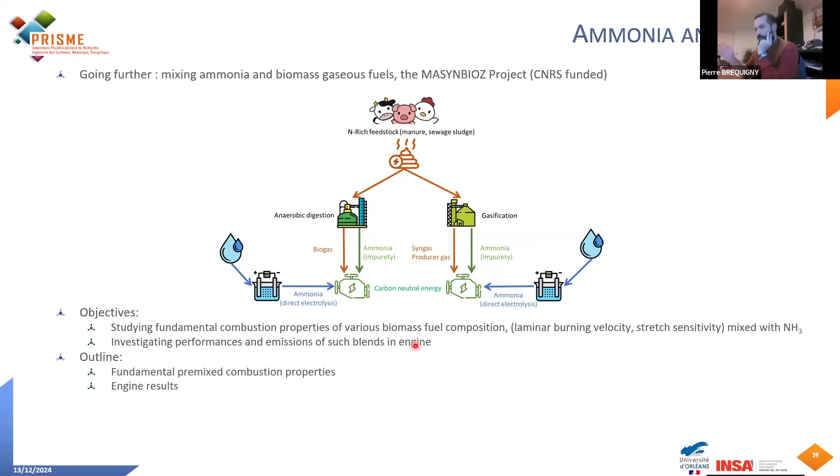So I will present, as before, first fundamental combustion properties and then engine results.

If we look a bit at the properties of the blends we investigated, we selected here 4 different syngas compositions and 1 biogas composition. So you have here the different components. Regarding the syngas, they have more or less hydrogen, more or less CO. They are more or less diluted, in some cases up to 70% nitrogen and CO2.

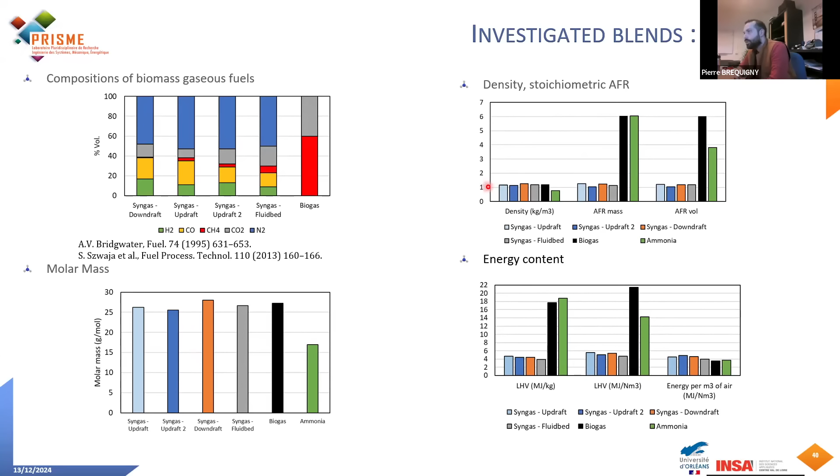This is very, let's say, bad quality. All of them have similar molar mass, a bit higher than the ammonia one. If we look at the density and stoichiometric air-fuel ratio, all those syngas compositions are similar, but with a really lower stoichiometric ratio than the ammonia and the biogas.

If we look at the energy content, the LHV, both mass or volume basis, for the syngas are much lower than the biogas and the ammonia. But if you compare that on an energy per cubic meter of air basis, they are all similar. So it is possible to burn this in an engine, and it will give you a power output that is reasonable.

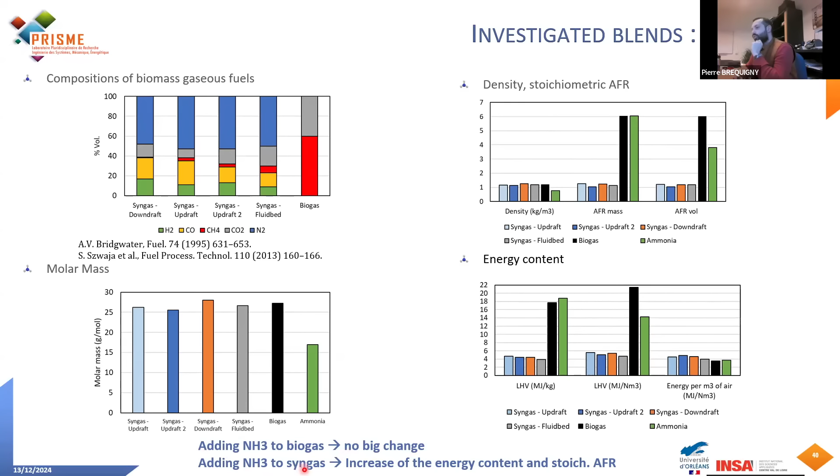If we look at the effect of adding ammonia to the biogas, basically there's no big change from those bar graphs. If you add it to syngas, you will probably increase a bit the energy content and the stoichiometric air-fuel ratio. So what about combustion properties?

First, laminar burning velocity as a function of equivalence ratio. This is basically a 1 bar and 300K experiment. So you have here the pure ammonia with its very low burning velocity, and the different syngas compositions and biogas in between here in black. You can see how the composition can affect these properties.

The most diluted one, the fluid bed composition, is here, whereas the biogas and updraft 2 are quite similar. If we mix ammonia with biomass gaseous fuel, adding ammonia will surely decrease the laminar burning velocity, but in terms of stretch sensitivity, it will not have a big effect.

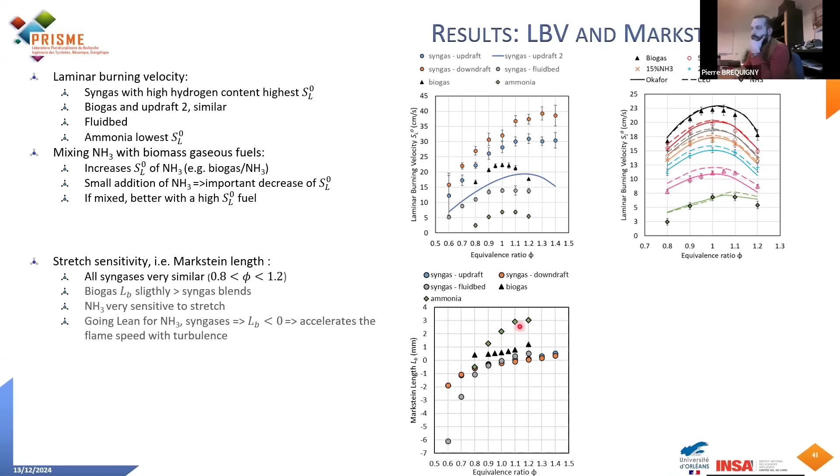So the main effect for the engine will probably not be the turbulence flame interaction, but the laminar flame speed. So this is what we tried in our engine: mixing this syngas with a bit of ammonia. We can see that we can increase the power output, but we need to advance the spark timing.

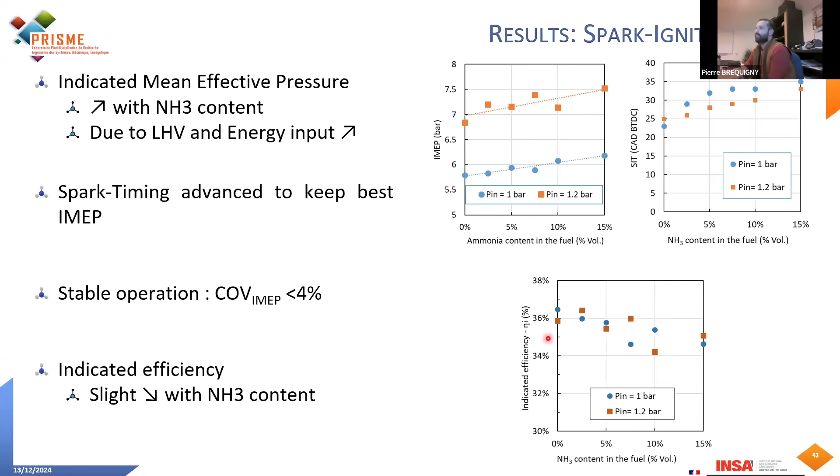We decrease a bit the indicated efficiency. We slow the combustion duration, as expected from the laminar flame speed properties, as with the previous fuels.

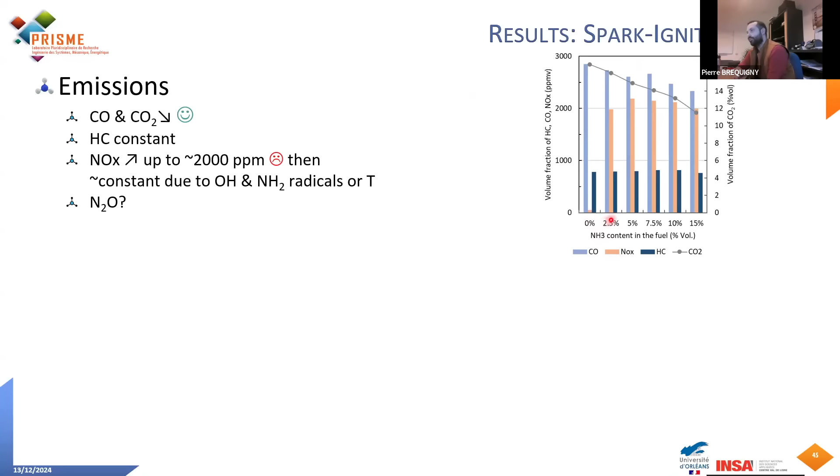And the most interesting part is on the emissions. Especially the NOx here in orange: as soon as you get a very small quantity of ammonia in your syngas, you directly get 2000 ppm of NOx at the exhaust. And this remains constant after, even if you add more ammonia.

Also in terms of combustion efficiency, if you compute it based on the hydrocarbon and CO emissions, you could think it is constant. But basically here we were not able to measure the unburned ammonia, so we had to use the oxygen content to compute another efficiency. You can see that here you will decrease the combustion efficiency adding ammonia, meaning that there is surely unburned ammonia at the exhaust.

So to conclude the presentation, hydrogen is a nice opportunity for transport, but it has several challenges to address, especially characterizing the fundamental properties for very lean mixtures, studying the effect of intrinsic instability due to thermodiffusive properties, and also studying the effect of steam dilution, which is quite used in engines to avoid backfires or knock.

Regarding ammonia, it has easier storage compared to hydrogen, but the combustion is quite challenging, and we need to tackle the limited range of operation and the ammonia slip, and better understand the turbulence flame interaction.

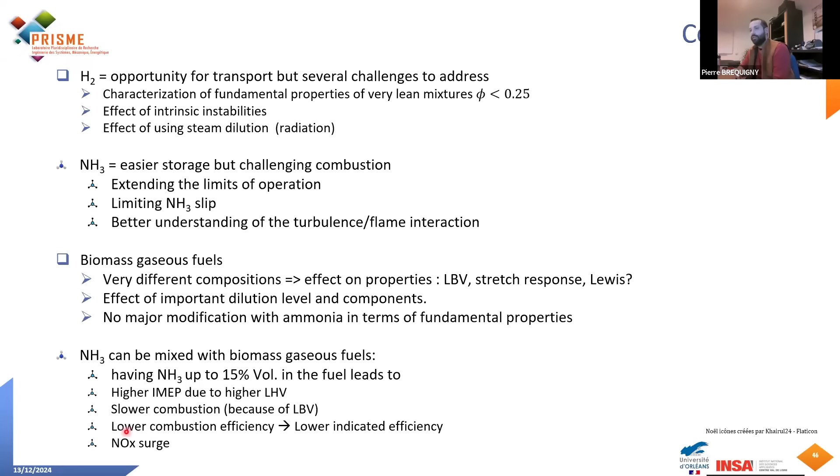Regarding biomass gaseous fuel, we can have very different compositions, and there is a question of how those compositions affect the properties in terms of burning velocity, stretch response, thermodiffusivity, and also how the dilution level and the dilution component can affect that. Although there is no major modification when you have a bit of ammonia in it, and then it can be used in an engine, as it will lead to higher power output, a slower combustion, and therefore a lower efficiency, and you have a problem with emissions with both NOx and

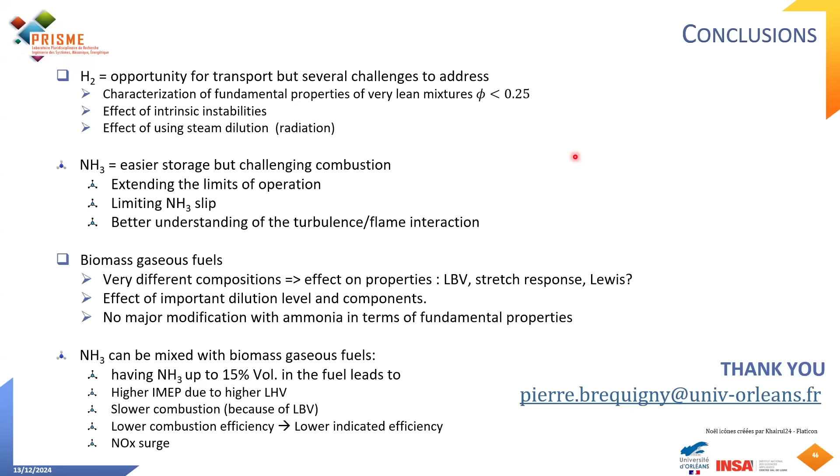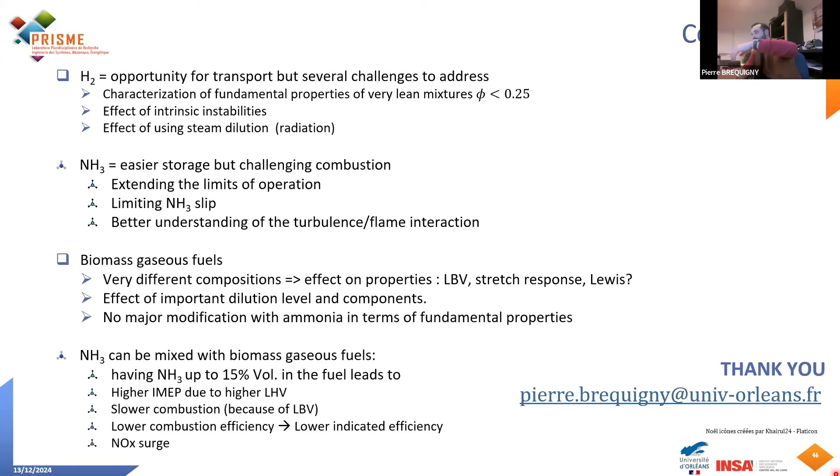And there is another thing that can happen when you increase the turbulence. At some point, you're getting smaller and smaller wrinkles, so that your turbulence scales become smaller and smaller. So you wrinkle the flame more and more, but at some point this has a limit, and your wrinkles will recombine into bigger ones. And then your flame surface is decreasing. And so the turbulent flame speed enhancement is decreased as well. I hope I answered the question. Yeah, thank you.

Thank you, Mustafa. Are there any other questions? If not, I just have a more general question regarding the future of internal combustion engines. If you have your perspective, might be a biased perspective, but I'm really curious about the research that will go on. You've shown us different injection methods. Have you been thinking about whether these new fuels will also change the way the engine is designed, and the way the cycle is prescribed? I've heard about 3-stroke engines rather than 4 strokes. I'm just curious about your take on this matter.